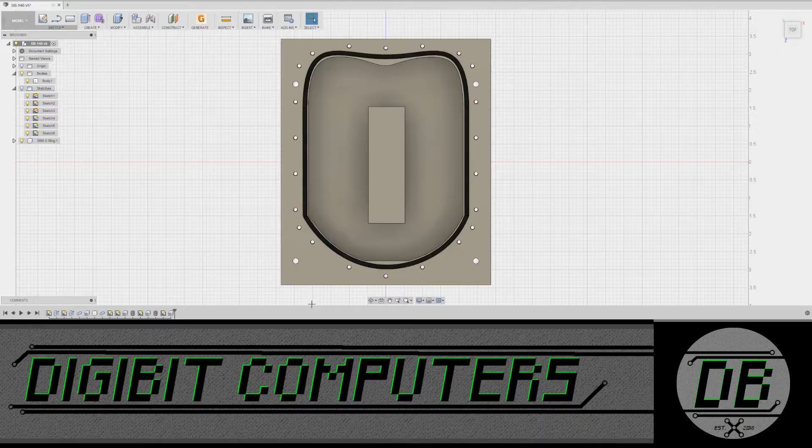So as you can see, I got a little bit further than we did on the last video. I didn't do too much, all I did was add some holes around the perimeter and add some threading. If you want to learn how to make holes in Fusion 360, see the video up here.

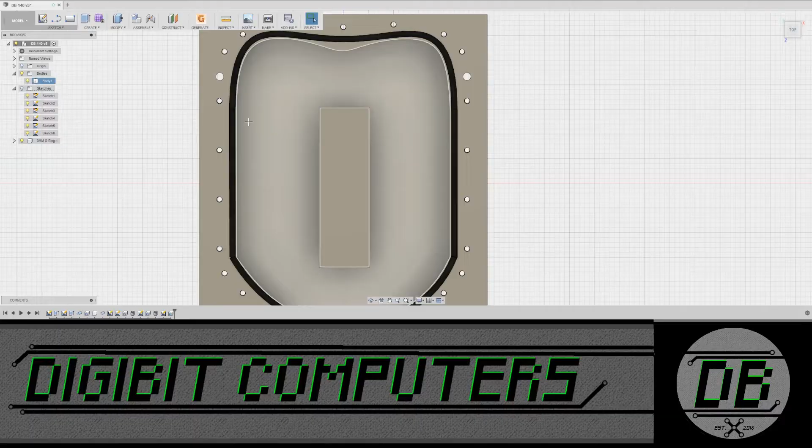As you can also tell, these holes are a little bigger. I actually bumped these up to what an M4, or 4mm, size is. This is purely just to give us a little more wiggle room, since sometimes those rear case fan locations can be a little crowded or things can sit in there a little funny. This will give us enough wiggle room to get that thing centered perfectly.

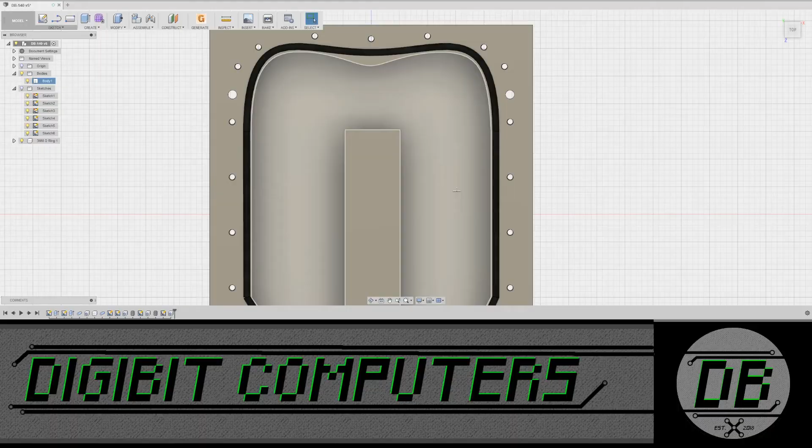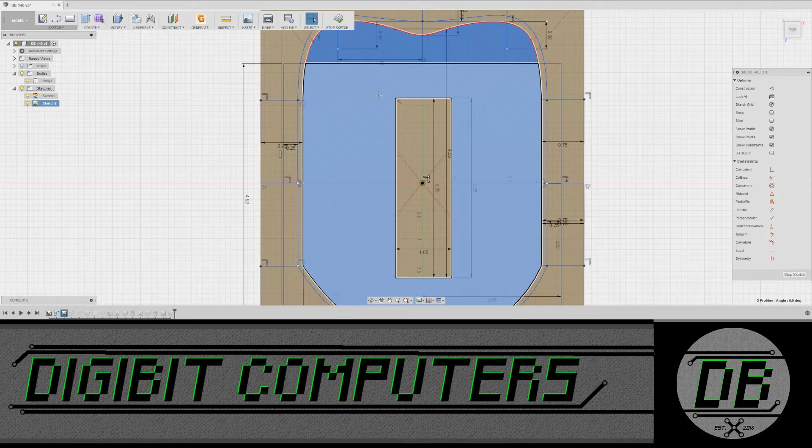On top of everything else I did, I also added this little anti-cyclone block. How I did that was I just went back to the original sketch and added a 3.25, or 3 and 1/4 by 1 inch, rectangle. You put this dead in the center, select whatever it is you're wanting to pull out of the block, and voila, when you pull it, it leaves that in the center.

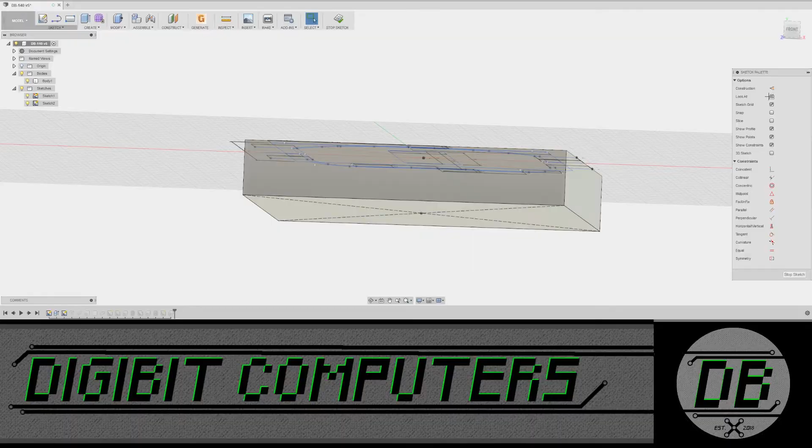Now, I did move this down, move that back in the picture. I moved it to where I left a 1/4 inch on the bottom. I was afraid that what we left before would crack over time, thus leaking coolant and making for bad times.

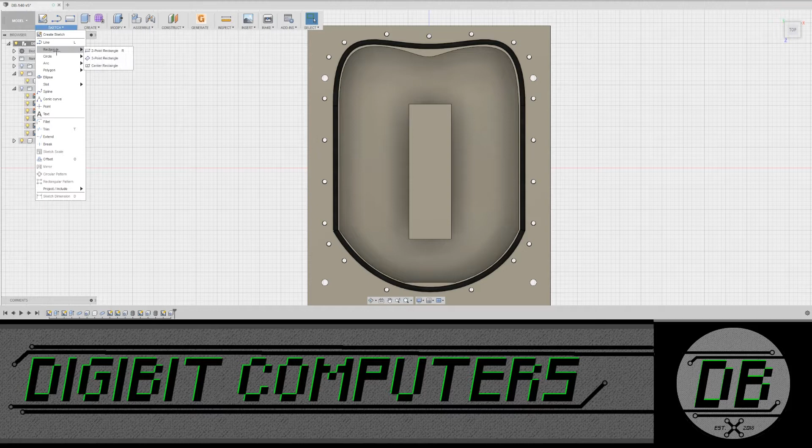So what we need to do now is make the top plate that goes on here and sandwiches this O-ring. To do that, we're gonna go to Sketch, Rectangle, 2-point rectangle, and select this axis to draw it on and just drag it out. You don't want to click or else it says you're done with this rectangle.

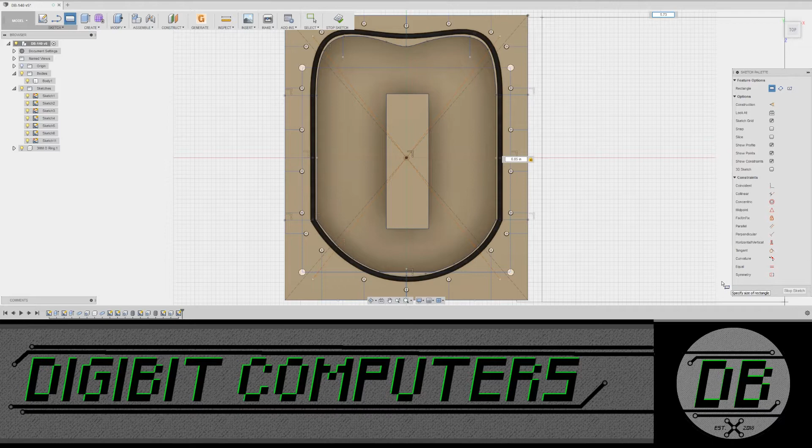So let me look up my handy dandy measurements here. The first part here needs to be 6.85, and that's going to be with a width of 5.73. When you're done, you just hit enter again, and look at that, we have a rectangle.

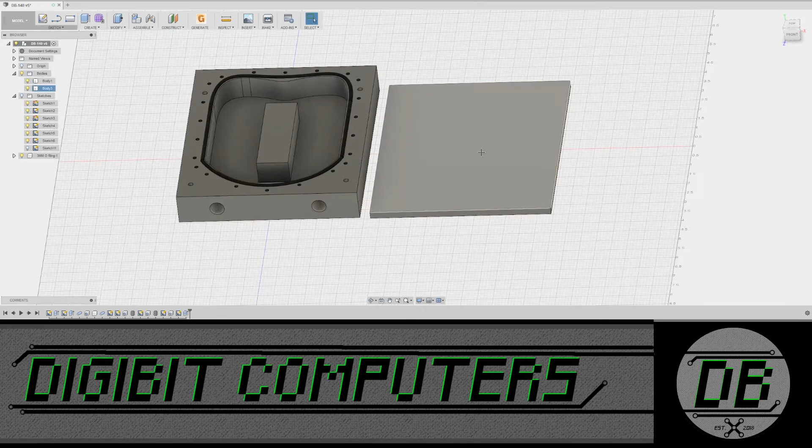So right click on that, go to Press Pull. Now our top plate is going to be a 1/4 inch thick, so 0.25, hit enter, and now we've got a top plate. However, when we go to hit join by hitting J, we can't really select it.

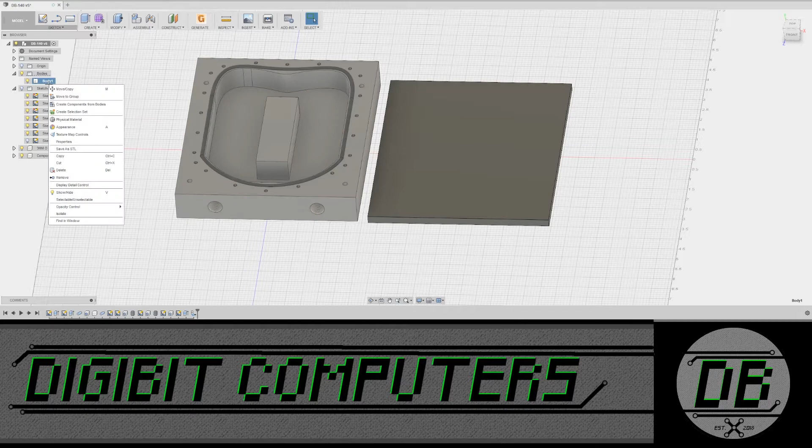The reason for this is because in order to join something, it has to be a component. So we go over here, select this body, right click on it and go to Create Components from Bodies. Now you do the same over here, click J, and voila, now we can actually join these together.

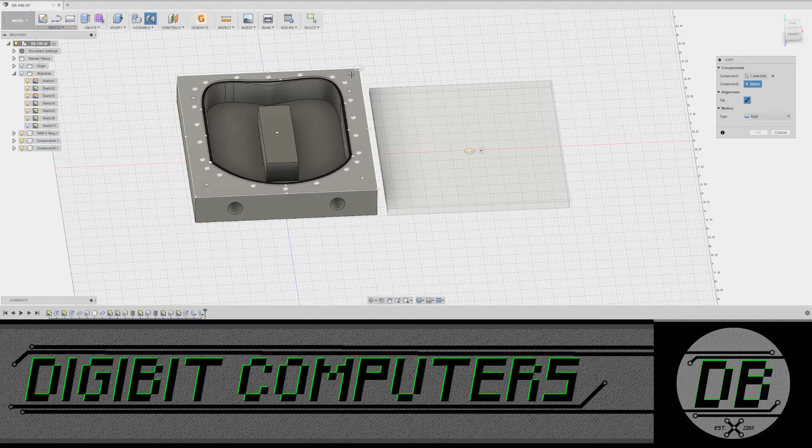So select the middle part here. You want to select whatever it is you're moving first, because this part's gonna move, and you don't want this to move. Then we go over to this face, hit Control to hold the snap points, click on that, and look at that — now we have an even bigger rectangle.

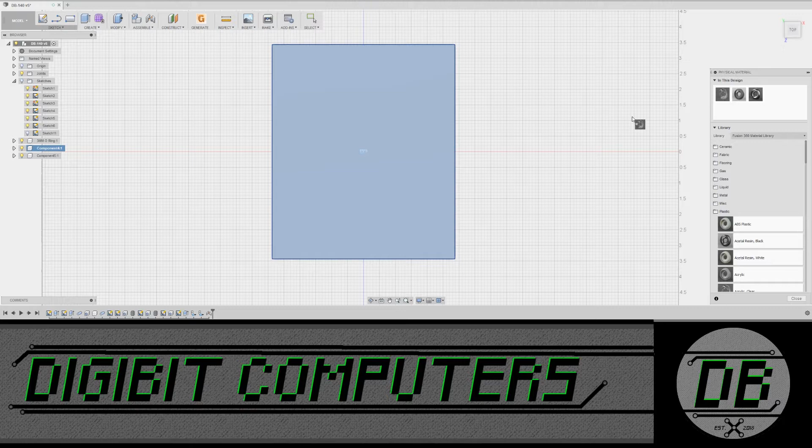So what we're gonna do now, since we can't see it, is right click on the component, go to Physical Material, and Clear Acrylic. Drag it over, and look at that — now this top piece is clear, so we'll be able to see whatever it is down below we need to change. We need to create our ports.

So I'm going to create hole. I'm just gonna select that face, and we're gonna go with a simple tapped flat hole. Now we go down here, select BSP pipe threads, which if you remember, this is a BSPP, not a BSPT. You can learn the difference between those in the second part of this video up here.

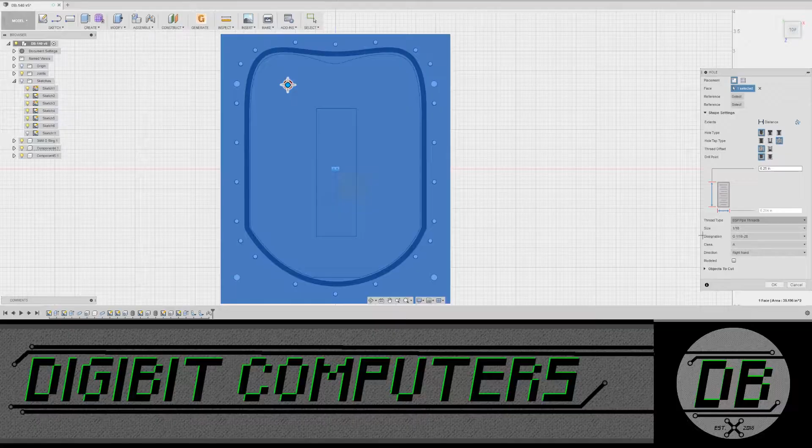And we're gonna make this a G 1/4 by 19 thread. Hit Modeled to show it. We want a depth of 0.25 — I put 0.26 just to make sure it completely goes through that top part.

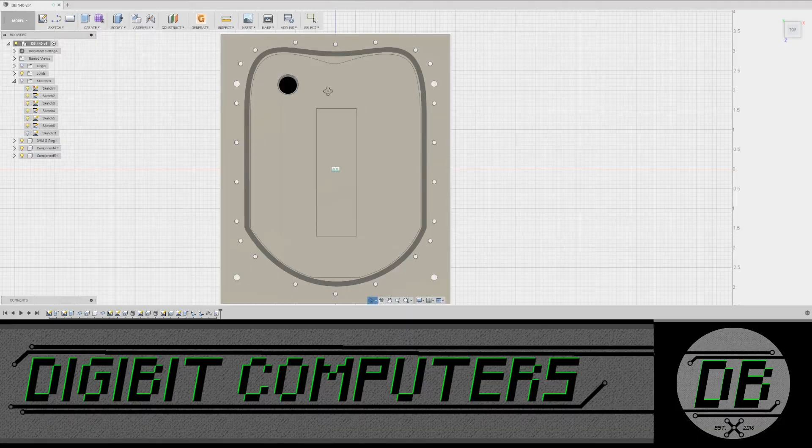And yeah, so that one's done. Look at that, now we got a hole in our top plate. We can put fluid in this thing now.

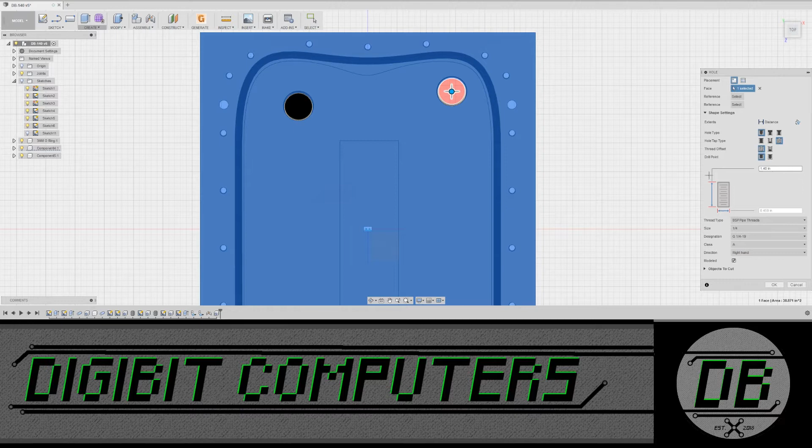We're gonna go over and create another hole. We'll just select that face, and I'm actually gonna move this hole up just a tad. Since we just made this hole, it keeps your settings, so click OK. I'm gonna select this first hole again, and drag it up somewhere in there. Click OK.

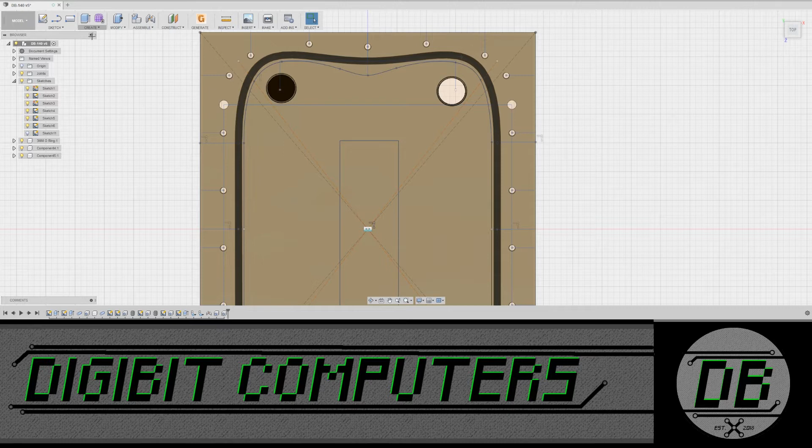Not perfect, but that's close enough for this demonstration. So what we've got to do now, click on sketches, and suddenly we can see everything. I also need to make a couple points here. We're gonna go there, there, there, and there. We're gonna stop that.

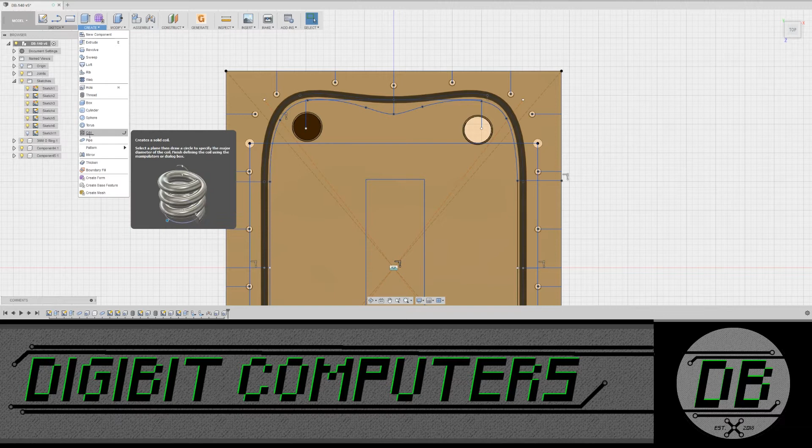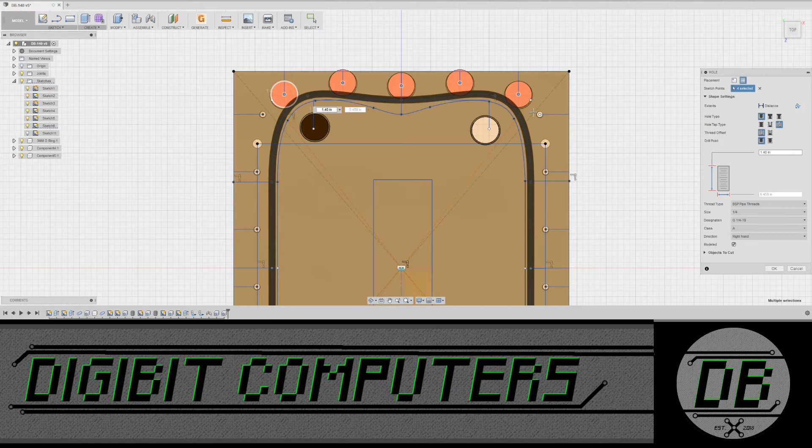With that done, now we're gonna make our perimeter hole. Once again, you go over here to create hole. We're going to select that point and that point, and just make our rounds and go all the way over here, which I won't bore you to tears with. So I'm just gonna skip ahead right about, and boom. Through the magic of editing, now we have all of these holes done up.

So we went with a countersink, simple, flat hole, and again we wanted a 1/4 inch thick, 1/4 inch wide. That is now done. We didn't thread this hole because we want these screws to just fit through here, sit flat in that countersink, and then actually screw into the bottom portion. So that's done. Click OK.

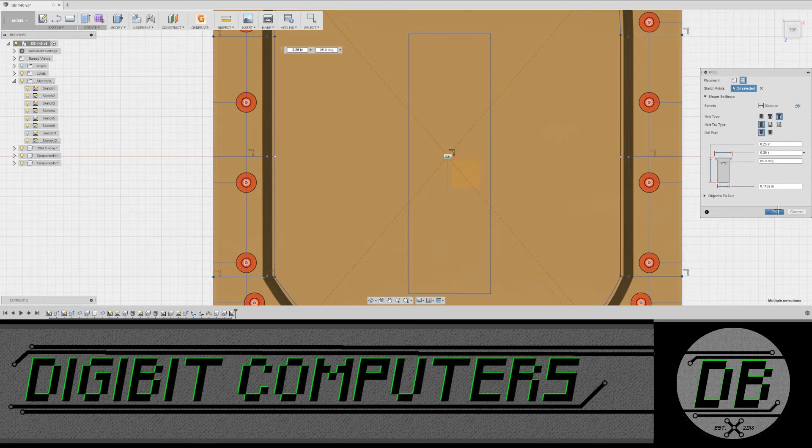Sit back, admire your work a little bit, but we are not done yet. We aren't done here. I just realized I made a mistake.

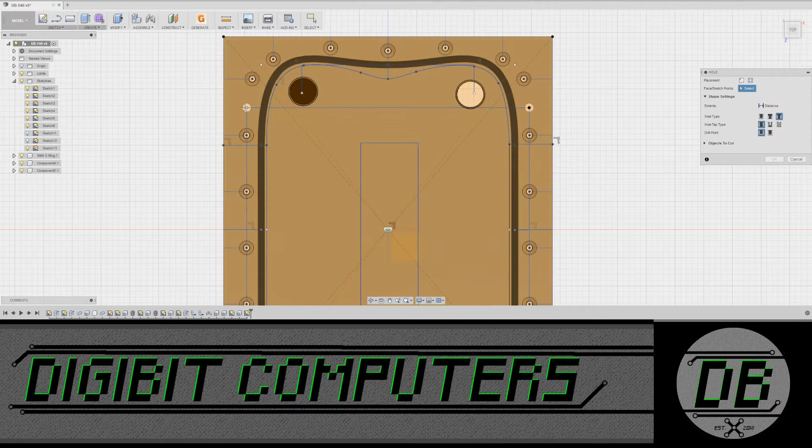Alright, so now we need to make holes for the fan location. So we go back to hole, we select that, and that, that, and that. Let's make sure, yes, we are on the correct part.

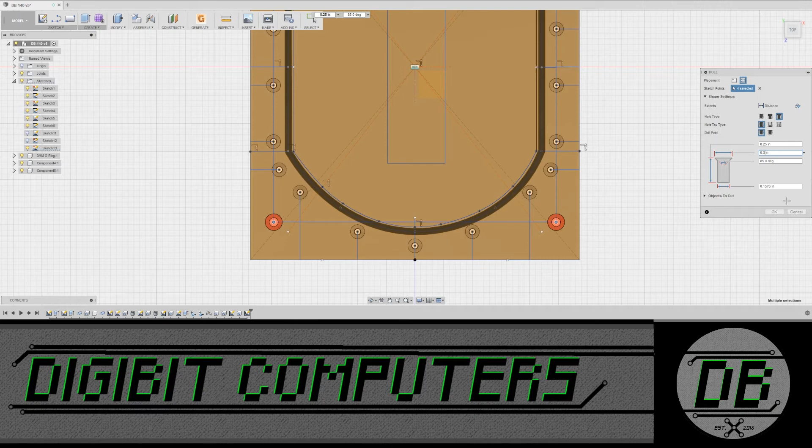This is going to be a 0.1576. And again we only want a 1/4 inch depth because that's how far down we're going. These are probably gonna be a little bit bigger, so we'll go 0.3 on the head size. So yeah, look at that.

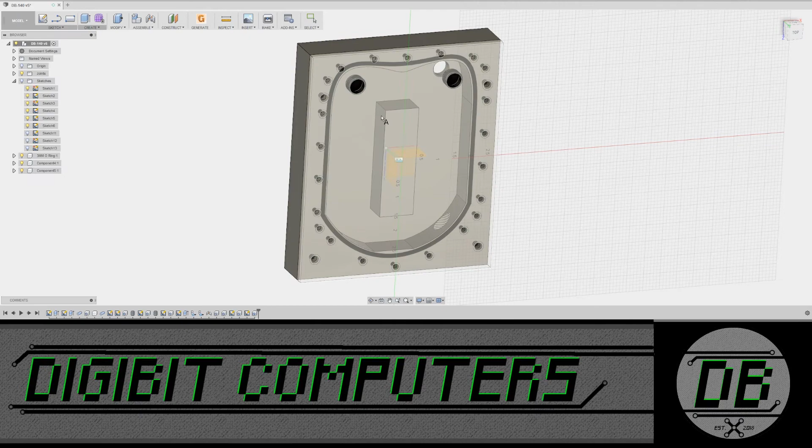That looks pretty cool. Go back to the top, and we're gonna add a little bit of pizzazz to this thing. So we're gonna go sketch, text, select that face, and I'm going to type - for whatever reason it's rotated, so 180 degrees, flip that back around, and I will put it on my font. Boom, that looks pretty sweet.

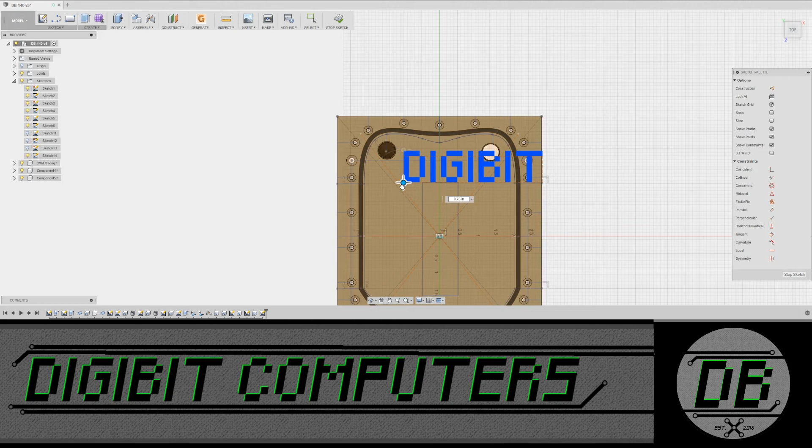Hit enter. Now we're going to select this, and we're going to press push pull. We're just gonna bring it down. Yeah, that's probably fine. And look at that - it's not custom till your name's on it.

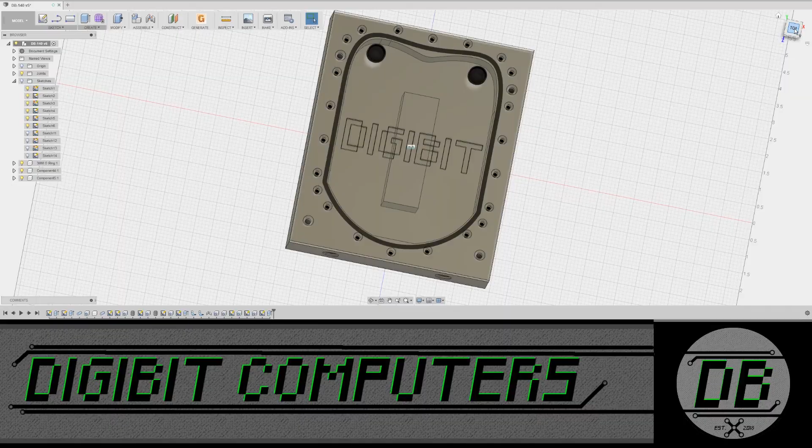Now the only thing left to do is to select this, go physical material, clear acrylic, and boom. Look at that. That's pretty sick. I'd buy it. I'm not biased or anything.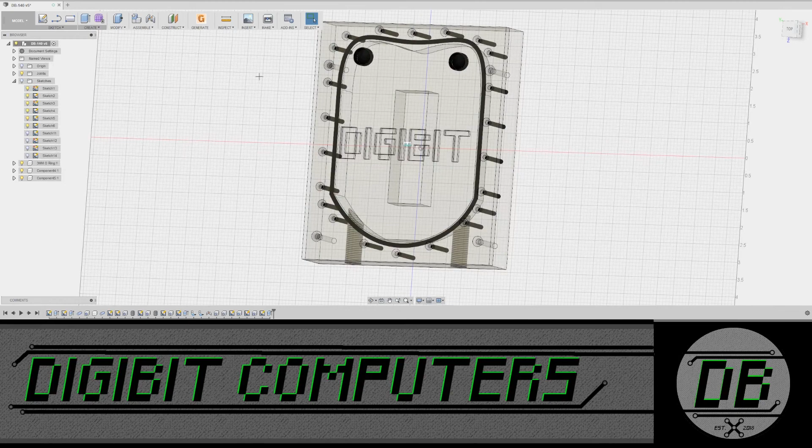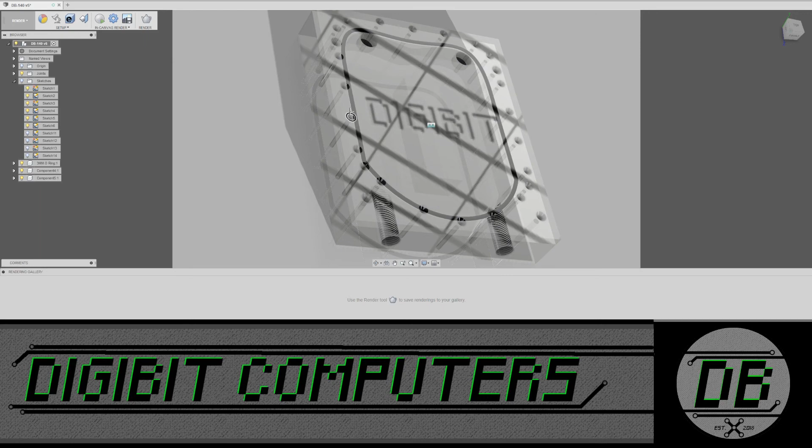Now, if you're feeling really fancy and you're running Fusion 360, you can go over to render. You can actually set this up, like get your perfect angle, and then do a local render. Depending on your computer it will take a while - it taxes the crap out of the system. And yeah, it'll actually come up with a rendered image of it, and a lot of times it looks pretty cool.

Alright guys, so I think that is a wrap on this custom reservoir. I appreciate you guys hanging out for this multi-part series.